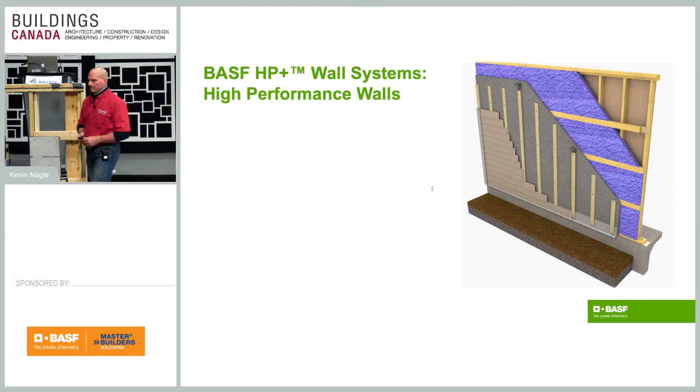The system we're going to talk about today is the BASF HP wall system. And what's driving this type of construction is the changing energy codes. So Canada is on a journey to achieve full net zero construction strategies across the country by 2032. Some of the code changes that are driving this process, they want mandatory blower door tests, and that was rumored to be starting next year. They've got no max air exchange goal set for that yet, but they're focusing in around 1.5 air exchanges to start on that. Renovation upgrades, that's also coming.

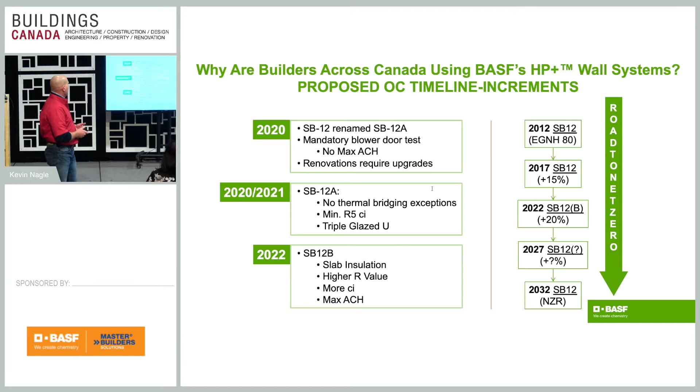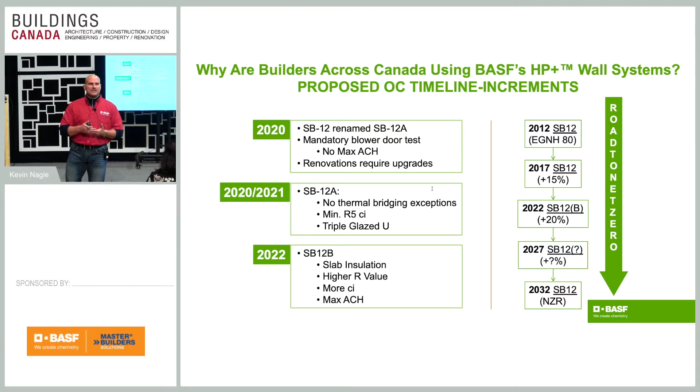No thermal bridge exceptions, and that's going to be one of the advantages we're going to talk about today. Minimum R5, so that A1 compliance package with SB12 will be gone, and they're going to want triple pane windows in there as well. Some of the other things you're looking at is insulation under slab. They're going to have higher R values required for the continuous insulation, and by the time we get to about 2022, you're going to have set max air exchanges that they want in the way of air tightness.

The HP wall system from BASF is approved for National Building Code and Ontario Building Code. It's also approved for the building codes out west. In BC, for example, they're following the STEP code. In Alberta and Saskatchewan, it's Part 9. It's compliant with the codes in Quebec as well. So it doesn't matter where you're using the system. This system not only will be approved with all the current requirements, but it's approved as the codes change in advance. And the advantage to you guys is there's no more guesswork and trying to figure out, well, what's going to work this year? What's going to work in 2 years from now? It gives you a cookie cutter template from which you can do your home designs and build from.

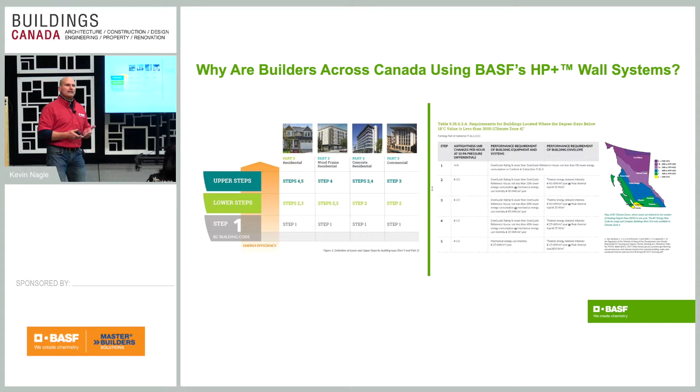So the key components that make up the BASF HP wall system consist of our Neopor rigid insulation. Rigid insulation, it's got a density to it of 1.35 per cubic foot. It's a breathable EPS, GPS insulation. The advantage of the graphite enhancement is that it deflects radiant energy. And the fact that it breathes gives you a truer R value in the way of performance. So instead of the materials losing R value when the weather gets colder, the R values actually increase when you need that performance to improve.

Walltite 2-pound closed cell spray foam. That is the interior insulation that goes into the wall cavity. That is actually 3 products in one because it's your insulation, your air barrier, and your vapor barrier. It also has a structural component to it, which enhances the strength of the wall to the point where we're going to show you that that wall would be stronger with our spray foam than if it was framed with traditional OSB and 2x6 studs.

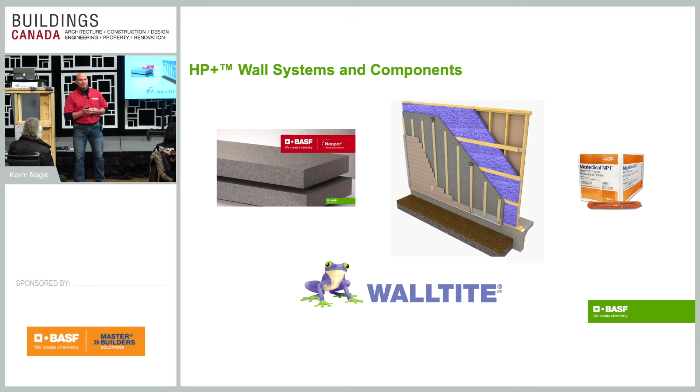MasterSeal NP1 caulking. That completes the air barrier system in the sense that when we're putting our spray foam in that cavity, on the exterior side, you still have a few potential air leakage liabilities that need to be sealed. And that's the advantage of what the caulking does. And then the final components to the wall system are Tyvek 3M 3015 membrane tape and our HP Flash, which is used to seal the windows, and I'll be covering that shortly.

There's a few key tools that you'll need when you're working with the system. The bulk of the tools that you use are consistent with what you use now, but when you're fastening the Neopor rigid insulation to the framing members, you're going to need a cap nail gun from Bostitch with the little cap nails. If you're framing with Neopor thicker than 1.5 inches, there's different caps and nails that go with that assembly. Caulking guns. For the sausage tubes that the NP1 comes in, we use a sausage gun. They come in battery format, or you can use traditional hand pump.

They're so much nicer to work with, the sausages, than traditional cartridges. You get better flow from that.

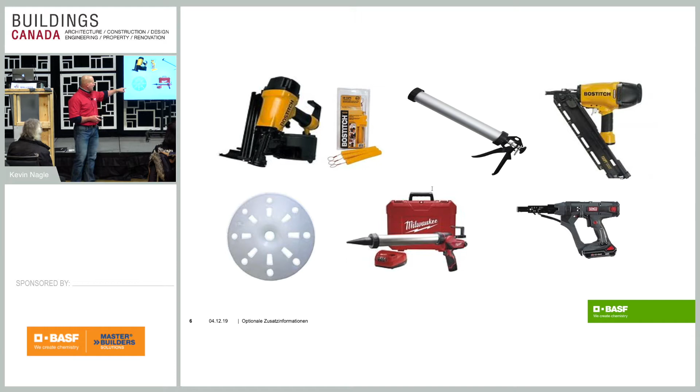The framing nail gun that you see up there: again, if you're working with Neopor thicknesses that are thicker than 2 inches, you're going to need a gun that's going to drive at least a 4-inch nail so that you can fasten your strapping to that wall and penetrate into the stud at the correct depths. Alternatively, depending on the thickness of the Neopor, at 2 inches you could also use a screw for that. And there's the screw gun that you can use as well if you're looking to attach your strapping to that.

However, when we subject these walls to the proper testing, building in a 2x6 top and bottom plate with 2x4 studs on 16 centers and running horizontal girts on 24s, the reduction in the thermal bridge just from the framing process alone has tested and proven significantly higher than staggered studs or framing on 24-inch spacing.

So when we go through the assembly process, you're going to start with your traditional format, lay out your 2x6 plates. And when you're running your NP1 caulking, all your 2x4 studs are going to be spaced on 16-inch centers. Double top plate, as you traditionally do, 2x6 bottom plate, and you're going to be using 2x6s for your window and door assemblies, for your jack posts.

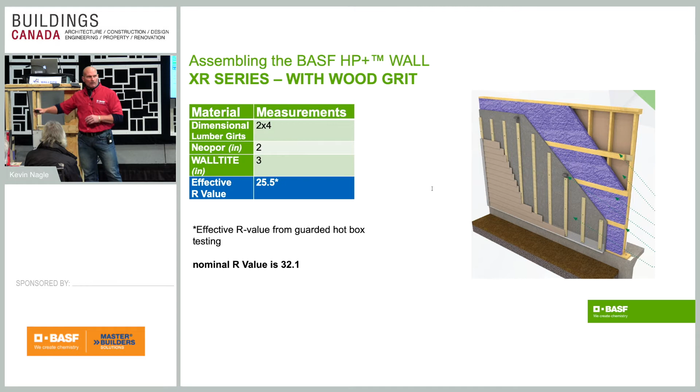Once that's done and your walls are up, you go about sealing your windows. Now, depending how you seal your windows, if you're using Tyvek, the Tyvek folds in, and again, you'll use that 3M 3015 membrane tape to seal that opening. But before the tape gets applied, all the corners in the windows have to be caulked using that NP1 sealant because you've got air leakage liabilities there. So once that's caulked, we run a strip of tape on each of the corners and then we tape the entire perimeter as you see here as an example.

Alternatively, you can also use the BASF HP Flash liquid sealant. The liquid sealant gets spread on like drywall mud, just with a drywall knife, a spatula. And once that sets, it sets like rubber.

When you're doing your exterior cladding, sorry for the feedback. If you're doing brick, you run your brick veneer right up the exterior surface like you normally do. Your brick ties go in on the 2x4 girts, okay? If you're doing siding, you're gonna strap the wall with 1x3 strapping. And again, depending how thick the Neopor is, you'll either fasten that strapping with the timber gun if you're 2 inches or thicker on the exterior, or you're gonna use a screw.

What's nice about the screw is when the siding guys come in, if they need to play with that strapping and adjust it to ensure that the siding goes on straight, it gives them that flexibility to do that, versus with a nail, they don't have as much play with it. And then of course, depending on the siding, whether you're running vertical or horizontal, the system pretty much works with any type of exterior cladding you want to put on the outside of the house.

If you're running vertical siding, we suggest you double strap or you'll run your strapping on 45s. There are some sidings out there that don't require you to strap the wall. So if you want to attach the siding direct to the Neopor, you can do that as well. You just got to make sure you follow the manufacturer guidelines for those types of siding.

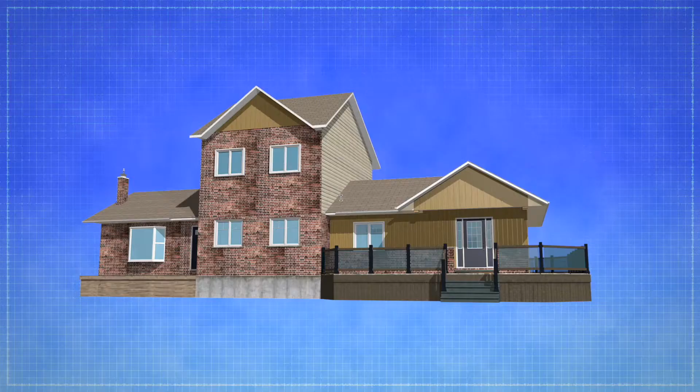We've got a quick video. So this video basically gives you a fast track of what the assembly process looks like as I just walked everybody through it.

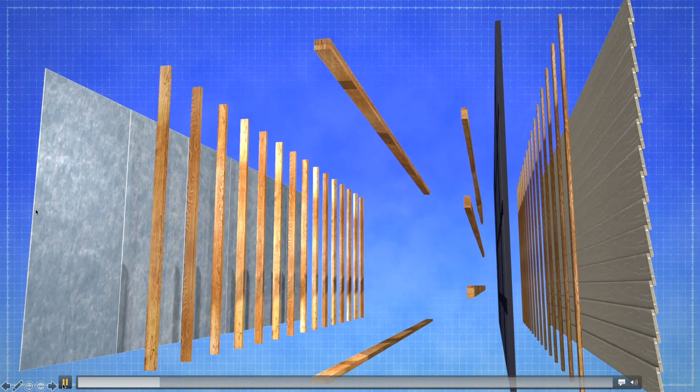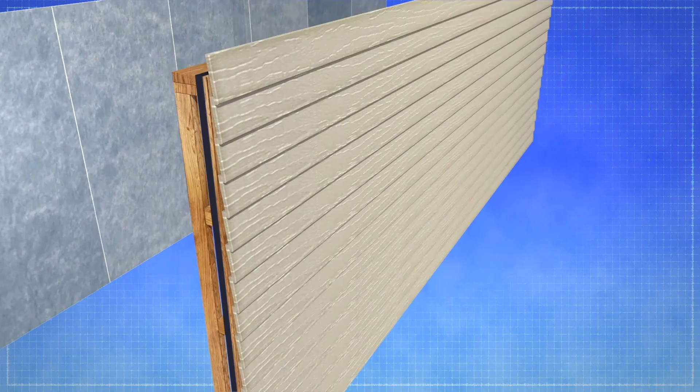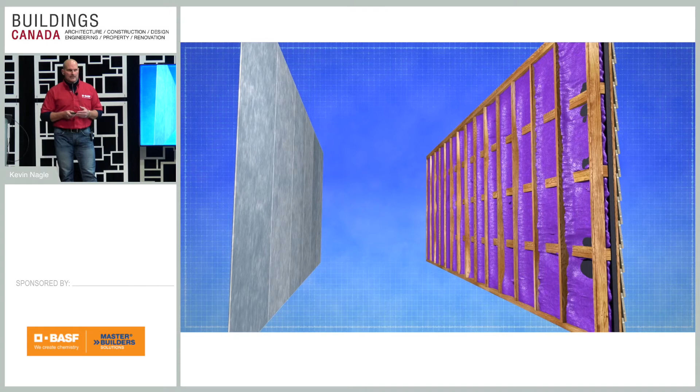Now, when you put the spray foam in the cavity, it's important that if you're spraying direct onto that Neopor, the spray foam contractors start with a 1/2 inch flash. That sets. If you spray more than a 1/2 inch in a single pass, it can compromise the Neopor. Once that 1/2 inch pass is set, they'll come back, they'll apply the additional 2 inches. The minimum amount of Walltite that can go into that cavity is 2.5 inches to meet all of the codes and the testing that we've done with the system.

One thing I wanted to show you is once that wall's assembled, here's where the advantage to the thermal bridge reduction really shows. If we hypothetically put 2 inches of Neopor on the exterior of that wall and you put 3 inches of Walltite in the cavity, the effective R value on that, which is after thermal bridging impact's been deducted, you're gonna get an effective R value of 25.5. Now, if you frame a traditional wall with 2x6 studs and an R24 batt, and you put no continuous insulation on the exterior, you'll get maybe around an R16 effective.

If you add 1 inch of continuous insulation onto that exterior framing with R24 batt, that'll boost your R value to R17, R18. So you can see the difference that it makes when you reduce that thermal bridge. If you were doing that conventional assembly and you spaced on 24-inch centers or you staggered your studs, from the testing that we've done, it may boost that R value from an 18 to maybe a 19 or a 20 even. So by building with a 2x6, 2x4 format, you've got a significant improvement in R value, and that structure is good under Part 9 of the code for up to 10 feet walls.

Once you exceed 10 feet, you can still build with this format, but you'd switch your top and bottom plate to 2x8 studs using 2x6 in the cavities, and you can still achieve the same results there.

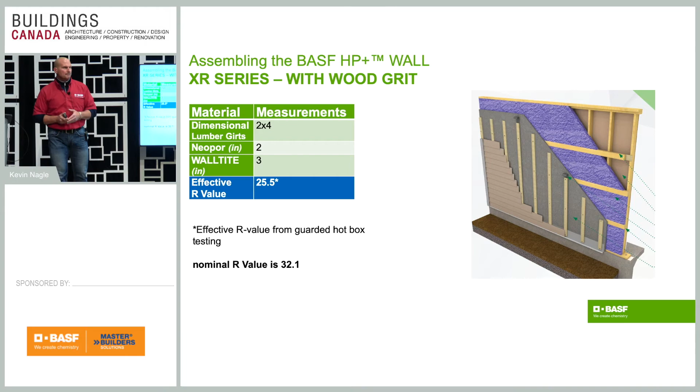So some of the benefits of building with our system, you're gonna get higher effective R values, you're gonna get greater air tightness. You're getting a cookie cutter system that's tested and proven, there's no guesswork. We've got our CCMC number approvals, you're getting third-party engineered testing reports that verify all of the results that we've talked about to you today. You're current and future code compliant.

You've got low global warming potential scores to these materials, and if you're of passive house mind and you're green conscious and environmentally conscious, those global warming potential scores are important. And we can talk about more of that later if you have questions on the specifics of that, but you're definitely dealing with products that are environmentally safe and friendly inside and outside. We've got all your code approvals.

The big advantage of framing this way is to meet the higher level of energy codes, walls have traditionally been getting thicker and thicker. So to properly insulate your house, you've been losing footprint and sacrificing living space. This wall system allows you to maintain a larger footprint and keep that extra living space without having to build too thick of a wall. You can eliminate that OSB sheathing, and building with the XR system, it will reduce wood use by up to about 25%. And you've got cost competitive to conventional framing.

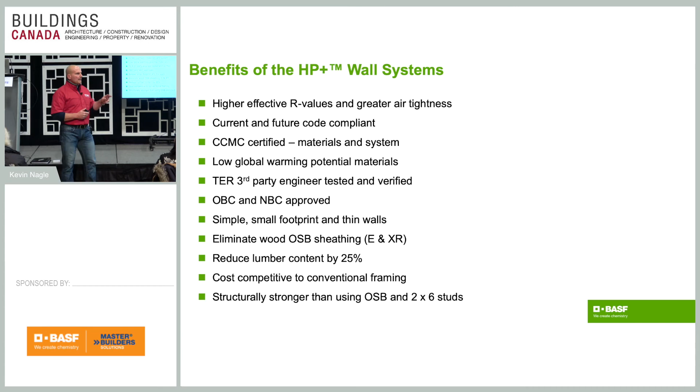Any questions? So the question was, she's asking about the retrofit industry. And we have another version of the system. So the system actually started with 3 versions. There's the XR, the E, and the X, and I'll explain those differences. The R series is designed specifically to accommodate the retrofit industry. So if you're stripping off exterior cladding and you want to re-insulate from the outside, our system will meet those requirements for you.

One of the changes in the code, though, is if it gets passed, they want the exterior upgraded. So they're going to be pushing for the exterior insulation on the outside of the house. How that's going to be enforced, we don't know. We haven't heard much on that yet, but that's the direction they're pushing in.

Yeah. So labor-wise, in the cost analysis that we show you, we've used about $54 an hour as the labor rate. That labor rate will vary depending on where you are. We've got 200 some odd projects across Canada now that we've done to date. So we've been framing with crews out west, Ontario, Quebec. Only for 2019. For 2019, yeah.

But when you talk about labor rates and when you're on site, for the builder, your costs stay the same, but all you're doing is shifting money around. The framers pick up a couple of extra tasks with the caulking. The horizontal girts are a little different, right? But net cost to the builder usually stays in the same range, because now your building envelope and your framing is in the hands of one trade. So whereas you used to have to pay somebody to caulk from the interior side, somebody else might come and strap it when they put the siding on, your framer's doing everything.

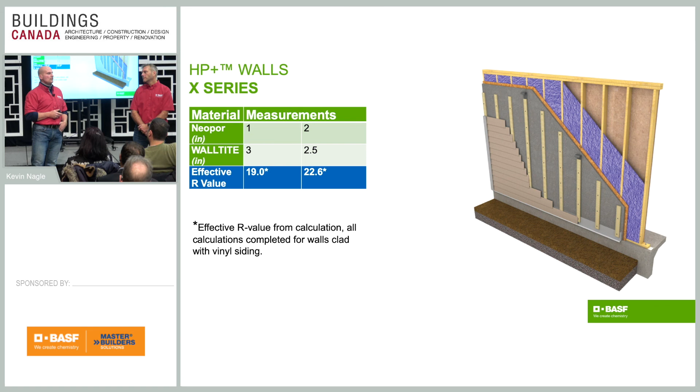So the other service that BASF provides to make sure that the job goes on track and that it doesn't go sideways on you is that we're there on site training the framers. So we'll be there for the entire assembly process. We'll work with you, the builder, and your framing crew for your first 3 projects, and we're there from start to finish. And that way we can coach them, we can address questions as they come up, and we can keep the project moving in a timely fashion. By the time that they're done, most of the crews pick it up very, very fast, and they're good to go without us.